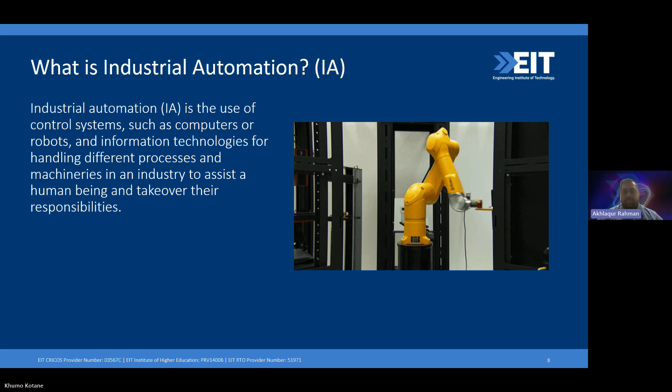What I want to do at this moment is explain why industrial automation is so relevant. I think all of you attending this session have heard about electrical engineering, civil engineering, mechanical engineering, even process engineering, chemical engineering, electronics engineering, even robotics. Automation as its own stream is something unique that EIT provides. People from all these different backgrounds can come to automation and learn their craft and provide it back into their industry. So that's where automation is so broad.

Now, why is automation important? In order to understand that, we have to answer the question about automation.

One of the terminologies that is very popular with automation nowadays, and I'm writing it in the chat, is Industry 4.0. Some of you may have heard this term. If I ask what is the first thing that comes to your mind when I say Industry 4.0, some of you may answer digitalization, AI, IoT, and a lot of those things. We are currently in the middle of the fourth industrial revolution, or Industry 4.0. So when we talk about industrial automation, we are talking about the current age of industrial automation, which is Industry 4.0.

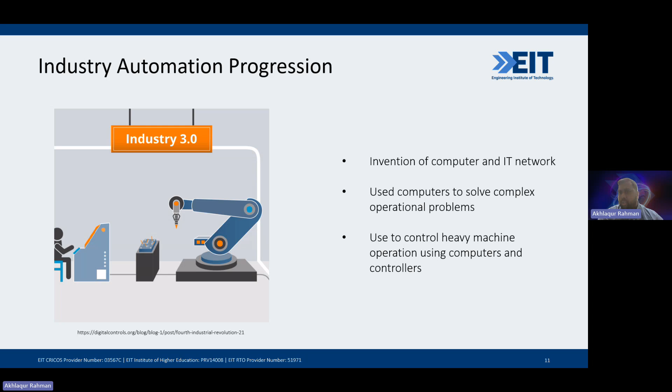Quite a lot has changed if you think from Industry 1.0 to 2.0 and now 3.0, slowly moving away from the action. And that's what happened after about a decade back, 10 to 15 years back, when Industry 4.0 arrived. So Industry 4.0 is what we're currently in the middle of.

It's actually aided by the invention of the Internet of Things. So what is the Internet of Things? Now, instead of controlling one machine, multiple machines can communicate among themselves. These machines are smart enough to use their own internet, hence the name Internet of Things, and can communicate with each other and make decisions on their own level.

For example, at a plant floor, if you want to check the temperature and it's not below a certain level, the sensors may adjust accordingly to keep the temperature at a particular level. If you have a robot that is supposed to do a particular action when the temperature goes high, based on that, they might do different actions to control the temperature.

So now, instead of going manually and changing the operation, you are actually monitoring it from far away, maybe at an upper level, and also making changes remotely, or not even remotely, but not directly. That's the idea. So this is what automation has done.

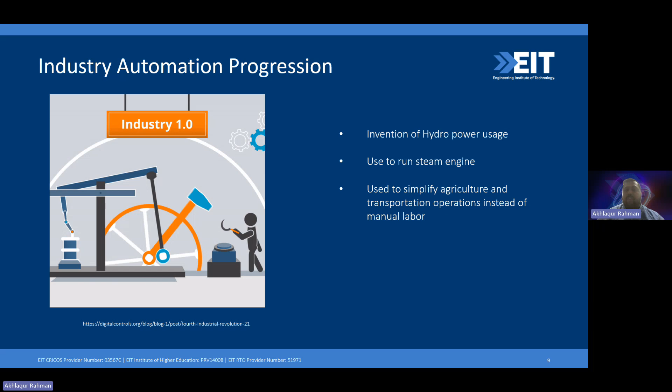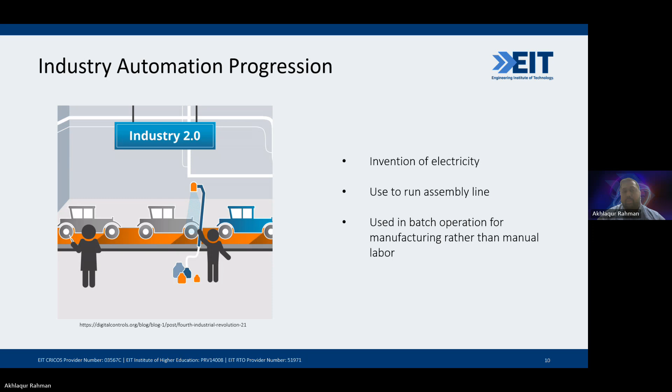If you look from the first industrial revolution to now, at every point, the role of humans has changed. People who were doing the previous work, their work became to an extent replaced by the machine, but that actually created more opportunities for humans to learn new skills, staying in the same industry just in a different space. And that's where we are currently at.

So in the middle of Industry 4.0, where you have all these new technologies, smart cars, smart robots, smart watches, smart mobiles, smart houses, everything is smart. That makes humans need to upskill to apply those changes in the machines in a smart way. And that's where you guys are currently, trying to upskill yourself so that you can integrate with this new stage of industry.

One thing that's not part of it here, but I'll just quickly mention, is Industry 4.0 we're currently in the middle of. What happens after Industry 4.0? Industry 5.0 will come. That's another exciting part. I won't have much time to present it here, but that's where robots and humans will work side by side.

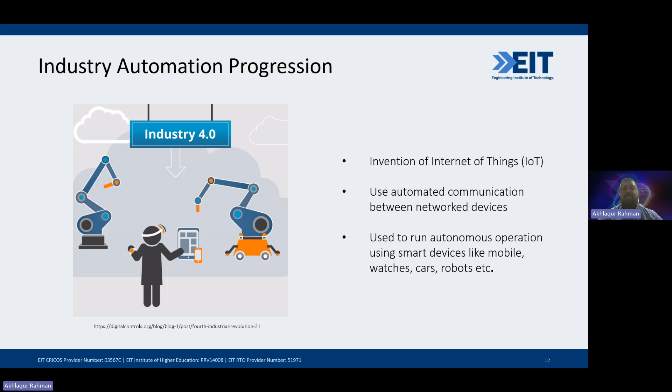With AI now, you can see how work is becoming more powerful, AI supporting. If AI can support robots as well, we may be able to work side by side. Again, your skill set will need to upgrade at that point as well.

Anyway, so ultimately what we're trying to say is 75 million jobs may be displaced by a shift in the division of labor between humans and machines, but 133 million new roles will emerge. So there are always more roles emerging than roles that are getting lost. And that's because all of you attending this session probably have a goal of upskilling yourself so that you can...

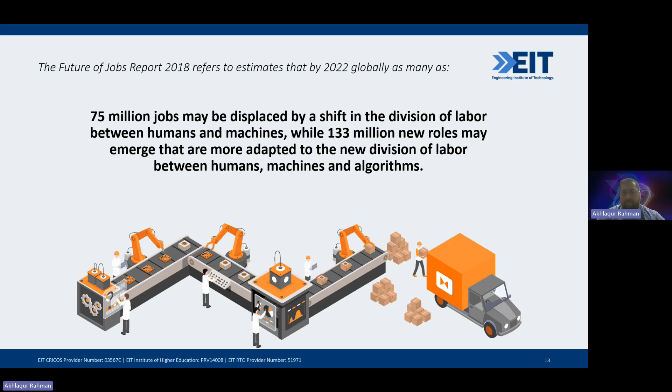And that's what industrial automation is. It's a journey where you're constantly upgrading yourself. So hopefully I managed to give a good idea of the background of industrial automation. It's nothing new, that's all I'm trying to say. It's been there for 100, 200, 300 years, and you are just doing exactly what people before us have done, and people after us will probably do as well.

It's very natural. So, with that in mind, and keeping the idea that industrial automation is a broad area, that means people from different backgrounds can come to this area, and people from this area can go to different industries as well. So when you look at potential job areas for industrial automation, robotics and mechatronics engineers.

That makes quite a lot of sense because in industrial operations, you're working with lots of robotics, robots, or machines. And for that, you'll need to learn automation. So automation is all related to control. Control of what? Control of machines, control of robots.

Potential job: industrial engineering. I think of it as a management role. If it's an industrial manufacturing process, there is obviously a management role there as well, so you need to have that knowledge.

Control engineering is one of the key things. There are three key aspects that I feel are very critical for automation to be learned: control, instrumentation, and programming. So control engineering makes sense. Electrical engineering is probably the field closest aligned with automation, because control is also part of electrical and electronics. That's why people from electrical engineering, especially power engineering, are heavily invested in automation.

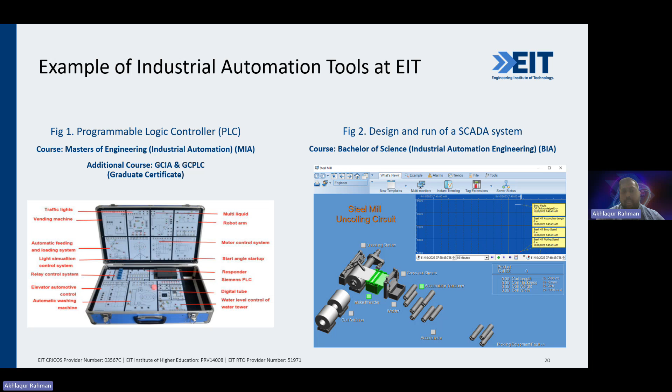As you can see about the PLC kit, that's part of our graduate certificate course. You'll be able to do programming as well as hardware and remote experimentation on PLCs. For SCADA, we use a software called Plant SCADA, which is an industry standard software. Through our remote labs, you can actually access those industry software for free. As a result, if you are already working in an industry, that's fine. Or if you apply for a job and they ask you, have you ever worked with this industry standard software? You can say yes, I have. I've done projects on them. I've developed a SCADA system as part of my degree. So that is a benefit of what we are offering.